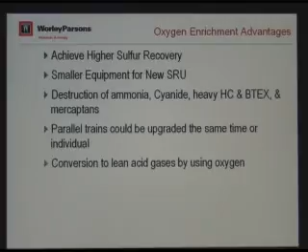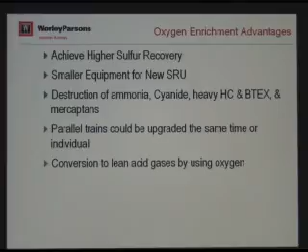Because we are using oxygen, the temperature is automatically higher. Remember I said we use air? I showed you the air blower. But if you use pure oxygen, what does that mean? For those who are not chemical engineers, put simply, it's a higher concentration, so the temperature is automatically higher. So we get better ammonia destruction and everything. Oxygen has a lot of advantages.

Let me show you. Also, we use oxygen for other reasons too - it's not only to increase capacity. In some cases, we get applications where the gas is very lean. Lean, for those who are not chemical engineers, means the H2S concentration is not very high - we call it lean gas. When the gas is very lean, we have difficulty with the combustion temperature.

Because with H2S and oxygen, if the H2S is rich, the temperature is higher. When the H2S is lower, the temperature is automatically lower - it's just very basic knowledge. So for cases with very lean gas, we prefer to use oxygen or enriched air. It doesn't have to be pure oxygen - at least we can enrich the air.

For those who are not chemical engineers, the normal air we breathe has about 76-77% nitrogen, about 21% oxygen, and the rest is like water. So when we use air, bringing it to the sulfur plant with the air blower, we're really only getting 21% oxygen. What's the rest? It's just junk, right? Nitrogen doesn't do anything - nitrogen is an inert gas.

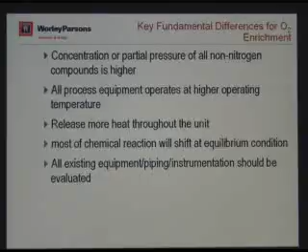You remember you asked me how many companies do sulfur? I said 4 or 5. When it comes to 100% oxygen, it becomes 2. Some other companies can do oxygen, the other ones, but to some level. If you look at their capabilities, they can offer mid-level oxygen, but cannot go higher because they don't know what to do after that. We can go all the way to 100% oxygen according to this technology.

Okay, I just want to give you some background on what this oxygen means.

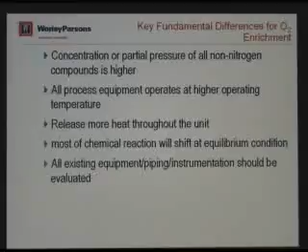When we use oxygen, there's a lot of safety required. First of all, you can get air, right? Air is free. But when it's oxygen, you need to buy an oxygen plant, or you can go buy oxygen. There are companies that sell oxygen - they can bring a tankage of oxygen every day or every 3 days.

What they do is bring equipment, like mobile equipment, and install it at the refinery near the sulfur plant. Every 3 days or whatever, they come and fill it up. Some refineries don't want to spend money to build the oxygen plant, so they just buy the oxygen - they get the oxygen company to deliver it to them.

They buy it, and depending on the location, it's $50 per ton, or it varies from $45 to sometimes $80 per ton. It just varies - if somebody is in a remote location, the company charges more to deliver it. But some people do that.

So when we get a project, the owner says, don't worry about the oxygen, I'll supply the oxygen to you, I get it, it's my problem. You assume you have the oxygen available, you tell me how much you want, I buy it for you. So that's the basis - normally they don't ask us because we are not the licensor of the oxygen plant anyway. Somebody else is. So all we get is the oxygen at the battery limit and we use it for our design.

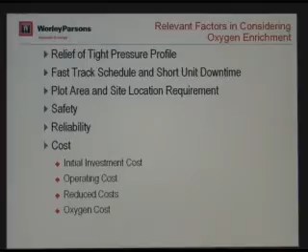This is a very simple formula - when we just breathe regular air, we have 21% oxygen. We can enrich the air to oxygen, and as much as we enrich it, we can increase the capacity. When we use 100% oxygen, we can double the existing capacity of the sulfur plant. And it's very good, right? Very good - it's a very cost-effective option for a lot of refineries.

They don't want to spend money. If somebody has a 100 ton per day sulfur plant and they need another 100 ton, they have two options - they can modify it, or they can go build another one. But modifying is always cheaper than building a brand new plant.

Because in a sulfur plant - I showed you the configuration - if you count all the equipment in detail, there are 26 pieces of equipment. If they want a brand new sulfur plant, they have to buy all 26 pieces. But if they want to modify it, it's limited to 3 or 4, depending on what equipment is in bad shape or good shape. So by comparison, you can figure it out.

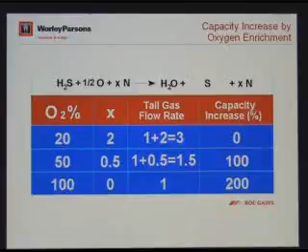It's much cheaper. But they have to add the oxygen cost because they have to buy oxygen. Even when they add it all up together, it's still cheaper.

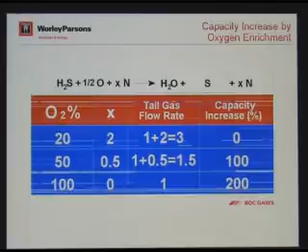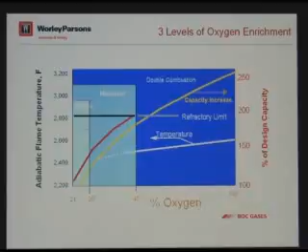Okay, we said we use oxygen. It's not easy to use oxygen without modifying the equipment, especially where? Remember in the reaction furnace we talked about, the temperature is already hot? I said that we use refractory and a brick and everything. You remember? Everybody remembers, right?

Okay, when we use 100% oxygen, the temperature is 5,000 Fahrenheit. What are we going to do? Better refractory? No, doesn't exist in the market. Better brick? No, doesn't exist. What are we going to do?

We had to come up with a process to do a staged process. We do some reaction, hit 3,000, stop. Put another equipment - cool it, warm it, cool it, warm it. We call it a staged process.

Why? Because there is no process in the market. I patented a process, they can do it in one stage. The patent is just granted. It's not commercialized yet.

But if you do commercialize it, it solves that problem. It's not commercialized yet, but the patent is just granted. It hangs in my office. If you get a chance, come on and look at them. But there is no material in the market that was able to do that.

And I came with a configuration to cool the system at the same time, so I can control the temperature. Again, a lot of people are interested. We are afraid to offer it since we haven't tested it yet. So it's not easy just to offer it.

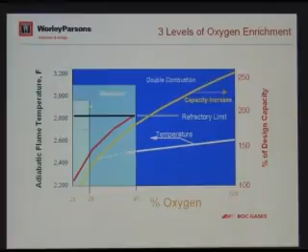Okay, what this picture shows is exactly what I told you. We use different oxygen percentages. We calculate the capacity, but hit the temperature. We cannot go any higher than 3,200 or we hit the refractory limitation. You see that? The refractory limit is right here. So nobody can do anything.

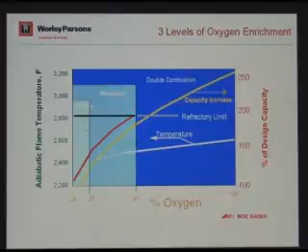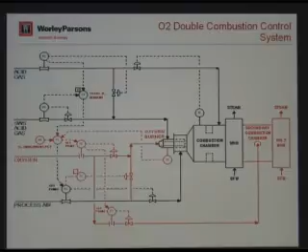It's the control system, don't need that, I'm going to show you. You see how complicated the control system becomes when you use 100% oxygen? Very complicated, you have to understand all this signal and everything. I'll show you how you do it now.

Okay, that was the existing sulfur plant, right? We talked about it. Assume one of the jobs we have in the office: somebody comes and says, hey, I want you to double my capacity. What are you going to do? I say okay, you remember, we had a burner here, right? Originally, when we designed the sulfur plant.

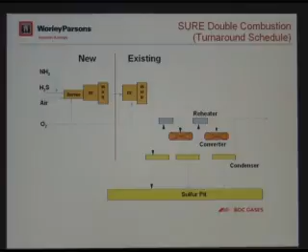We removed that burner, we don't need it. We buy a new burner, we call it the oxygen burner, and we put it right here. This is our ammonia gas that we talked about, it comes from the sour water stripper. This is our amine acid gas. You remember the two knockout drums we were showing? I'm not showing it here, to simplify it.

This is oxygen. What happened to the air? We eliminated the air, right? We said we buy oxygen instead. I buy a new burner, I design a new reaction furnace, I design a new waste heat boiler, and I split the oxygen - part of it to this one, part of it to this one.

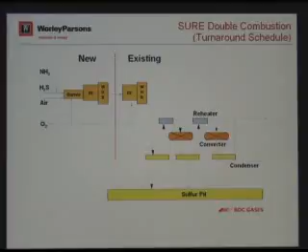Okay, what do we do in between? We control the temperature here. When it hits 3,000, we stop. We stop the amount of oxygen. We said, okay, we give 10 pounds here. When it gets to 3,000, for instance, we stop right there. We don't want to damage the refractory. What we do is put the rest here.

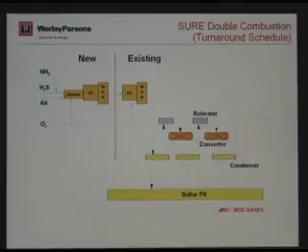And those are existing. So you can see that when somebody has an existing sulfur plant, by adding 3 new pieces of equipment - assuming all those pieces are okay, in good shape, not damaged after 30 years or whatever, we evaluate all of those - we add these 3 pieces of equipment and we double the capacity. This is patented technology by Worley Parsons and BOC.

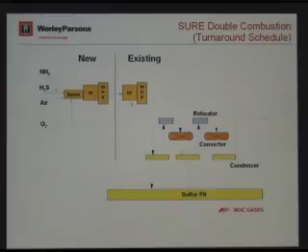If somebody doesn't have room to add all the equipment - refineries are very old, right? Very old, they are so congested - we cannot just go add 3 pieces of equipment. No room.

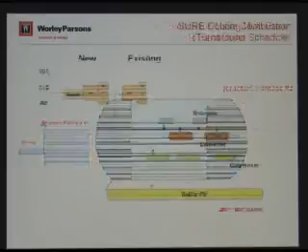We have cases where people come and say, hey, you want to add 3 pieces of equipment? I don't have any room. We say, fine, don't worry about it. What we do - you remember these pieces? We remove these 2 pieces that existed, and we combine it all together, we call it compact. We say don't worry, we'll fit it there.

We have many applications, we've done 45 plants, near 50 now - I haven't added all the new ones. Near 50, we modified them to oxygen. In some cases we used the previous configuration - if they had room, we added these 3 pieces of equipment. If they didn't have room, we used this one. We told them, don't worry, we'll fit it there, whatever it takes. It's a compact design; the other one is the normal design.

Can you use the old parts, or is the old one just thrown out? Well, if you use the previous configuration, we use the old one. No, I mean for the new one. For this one, no, because there's not enough room, no room. Somebody has to accept that if they don't have room, they cannot have everything.

Right? So we pull out those, we pull it out, and we combine them. Still there is 2 pieces. Still there is the same problem.

But what we do here, if you look at here, some part of the oxygen goes here. You see oxygen here? Some part still goes here, but it's all inside of each other. Call it compact design. It took us a long time and effort to design all this.

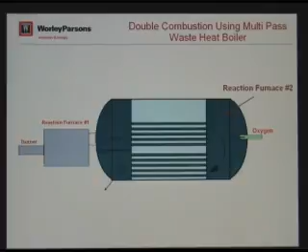How long have they been happening? The first one we designed was about 15 years ago. Where in Japan? The very first one. Becomes like that.

Remember? So we deleted all these two pieces here. Everything becomes like that. These are all existing. So they get this, everybody happy, if they have limitation with the plot space.

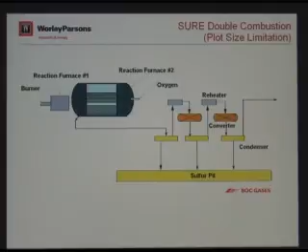Okay? But if somebody has two sulfur plants, they want to modify it. We can do many ways. We can independently modify each one of them, or we can do a common one.

We thought about every option, right? When we do a patent, you have to think about any possible things anybody wants to do.

We have an application in Louisiana. There are two existing sulfur plants. 10 years ago, they wanted to convert every single one of them independently. So each one got its own reaction furnace, its own burner.

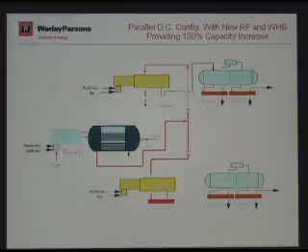But we have units in some other places, even in the US, they don't want to spend all this money, but they want to convert both of them. So the new part, we made it common. The new part, we made it larger to serve two sulfur plants.

Okay? Can see that. We put the new one, serve two units. It can go to that one or it can go to that one.

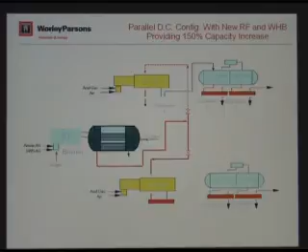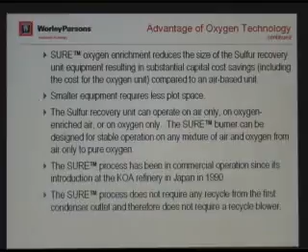And those are the advantages that we talk about of the burner. That was the one I mentioned that in Japan, the first one was 1990, called KOA Refinery. People have been in Japan, perhaps they recognize the name.

Again, the advantage, as we talked about, there are many advantages. It shrunk the equipment, increased the capacity, it's a better ammonia burning, has many, many advantages.

When the operator learns how to use, the operation of oxygen is different with the air, but we teach the operator how to operate it. When you start the sulfur plant, they cannot jump, open the oxygen line. They put everything on fire if they do that.

They have to start with air. When the unit gets a stable operation, gradually open the oxygen. They get instruction how they have to open the oxygen line and how they can increase the capacity.

When they want to shut down, the same thing. They gradually shut down the oxygen. They go on air. You cannot just shut down the oxygen, shut down the sulfur plant.

Okay, I'm done. No, it doesn't work like that. You gradually shut down the oxygen, go on air operation, gradually reduce your capacity on air operation. Just cut gradually. You cannot shut down sulfur plant immediately.

You have to cool it slowly. If you cool the sulfur plant immediately, you damage all this brick. Okay? We tell them how many degrees per hour they're allowed to cool it. Okay? There are a lot of procedures to heat up this brick and a lot of procedures to cool it down.

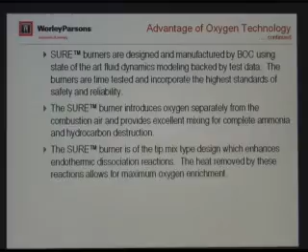We get a lot of calls for troubleshooting. Oh, I went to do that, this happened. What am I going to do now? Can you send somebody over?

We get a lot of questions. Oh, I went to do that, all my sulfur lines blocked with sulfur. Everything is solidified, I cannot do anything. Everything is plugged. What am I going to do now? We get a lot of questions like that.

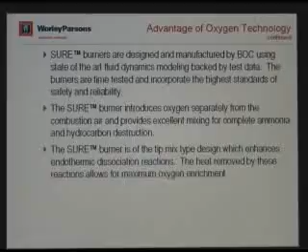We provide all the troubleshooting and services as part of being a licensor. People call us that we designed their unit 20 years ago, new operator. Oh, I didn't know, I'm new to the unit, I did something wrong, I need help. We help them out. If it's a 30 minute call, we help them. If they need somebody to go there, we send somebody over.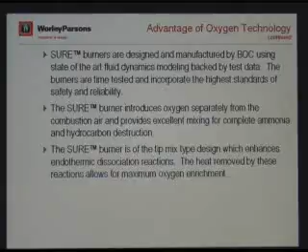We send somebody over for a startup of the new plant that we design, but also we get a call for existing units. I have one of my staff in Mexico this week. They wanted somebody to go there. They all messed up with all their sulfur plant. They don't know how to start it up again, they don't know what the problem is. So we go there to see what the problem is, we check it, we analyze it, we test it, and we give them a recommendation of what they have to do.

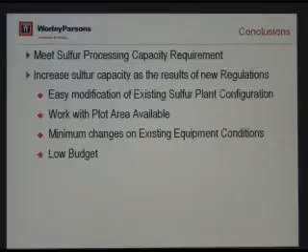Okay? As I said, we do all these services. I wanted to finish earlier so we can talk about all the questions you may have.

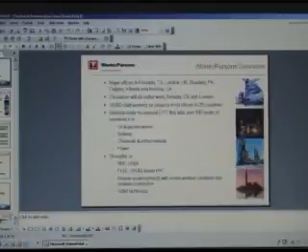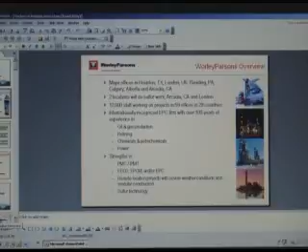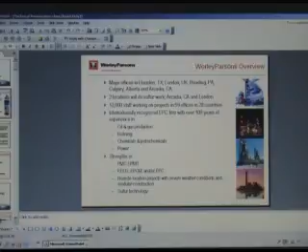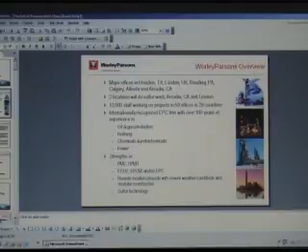As I said, the purpose of this presentation is not to teach you how to design a sulfur plant, because I don't want anybody to get bored or fall asleep or get tired. Because we as a company, you work in different disciplines, but because we provide sulfur technology as a licensor, you should know what exactly this is all about. You may work in non-process, not in the process department, but whatever you do, I'm sure somehow you've heard about sulfur or sulfur projects.

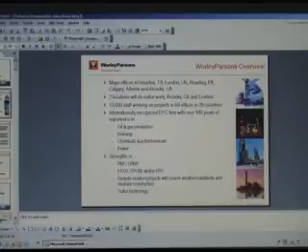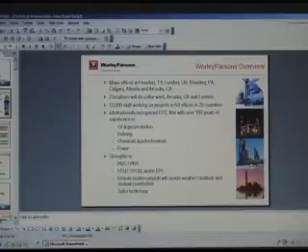Sometimes we only do a license package, doesn't involve other disciplines, but we do a lot of detail engineering also. As I said, for the 2 big Chevron projects, the majority of the work is sulfur.

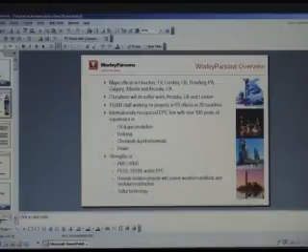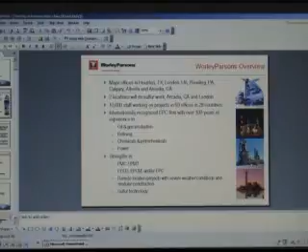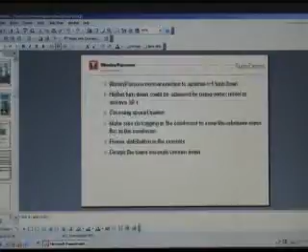Yes, of course. We license Oxy-Sure technology, a very big one, because it's a very complicated design. If you look at the control system that I went through very quickly, we modified the control system that they have. Let me go back. This is if you have air operation, this is the way we do the control system. Okay? Let me go to the oxygen slide.

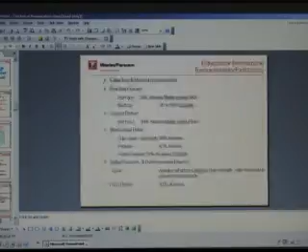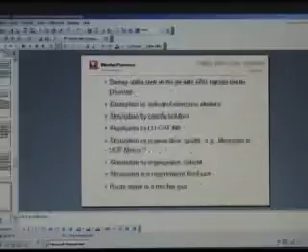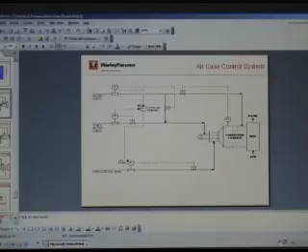You remember I told you that we have different levels of oxygen? For all the levels, sometimes we don't need to split the oxygen. If somebody tells us I only need 30% oxygen or 35%, we don't need to add all this equipment. Sometimes we have to replace the equipment with better refractory and stuff like that, but sometimes we don't need to do that. For those, we go to 35 or 40% oxygen.

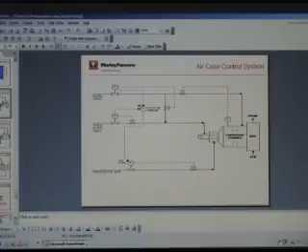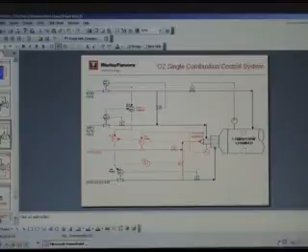You see the control system. This is for air. This is for single combustion. We call it single combustion when we go to the mid-level of oxygen. Mid-level of oxygen means we don't need to split the oxygen. We can still do it with the same conventional configuration, but we may need to change the refractory, or we have to make sure the existing equipment can handle it. So for that, you can see the red part. You can see, probably, I don't know, they didn't give you the color copy perhaps. The red part, you see, that's all we have to do.

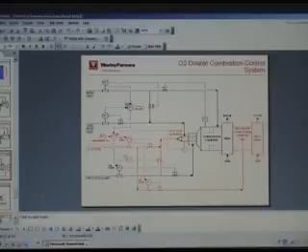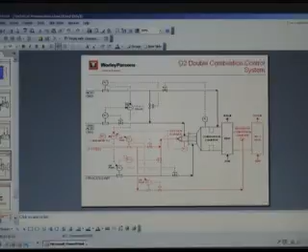When we go to 100% oxygen, you see that we have multiple stages and multiple equipment. You see all the control system we have to have. This is a summary of those controls. When we generate the drawing, the P&IDs, the entire drawing is all control. And we call it the burner management system. And we describe how this control system works, one of the documents we did.

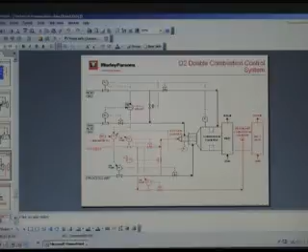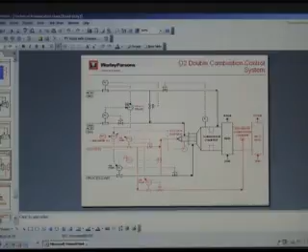Anybody from an instrument group here? No? Yes? We work with our instrument department. The instrument engineer is under the electrical group, electrical engineer. So the instrument engineer doesn't know how this control system works. We tell them what we're trying to do. We say, okay, we want to control this, we want to control that, we want to ratio this to that. We describe all that in writing. And we attach a copy of the drawing with a number. We say, okay, this instrument has to be connected to this, has to go to this. He reads our write-up, and he tries to implement it into the DCS of the refinery. And we get a lot of questions from them.